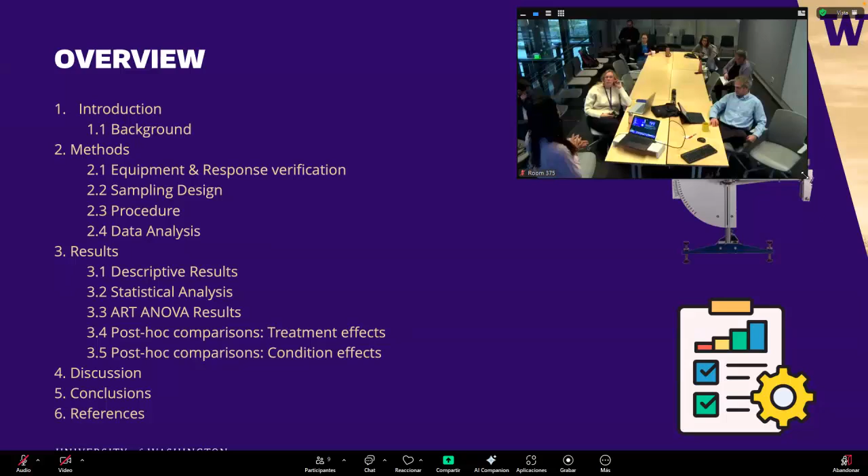This presentation will follow the structure of the written report. I'll begin with the background on slip biomechanics and previous research. Then I'll outline the methods used in the field testing. I'll present my descriptive results, the statistical findings, and some post hoc comparisons. Finally, I'll interpret these results from an industrial hygiene perspective, and I'll conclude with some recommendations for Sound Transit.

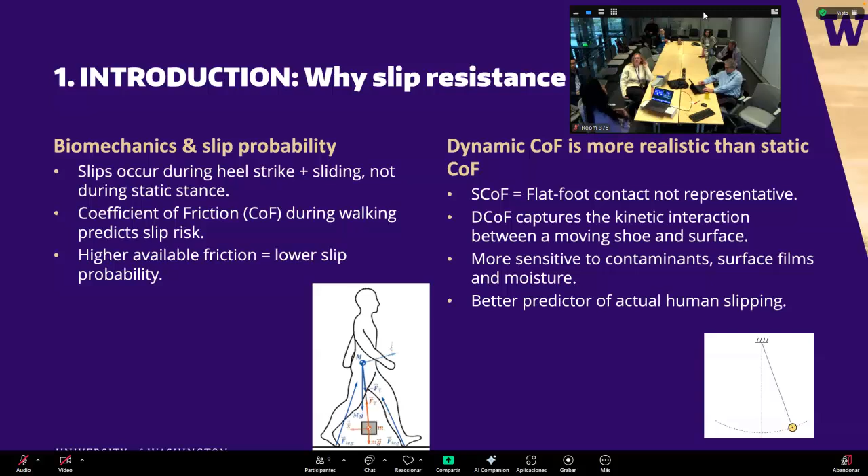So why do we care about slip resistance? Slips generally occur when the foot is already in motion, which is why static friction is not really representative of the slip risk. Instead, the dynamic coefficient of friction allows us to quantify the kinetic interaction and evaluate how contaminants like water reduce the available friction on the surface. Ultimately, higher friction corresponds to lower probability of slipping, making the dynamic coefficient of friction a more relevant metric for injury prevention.

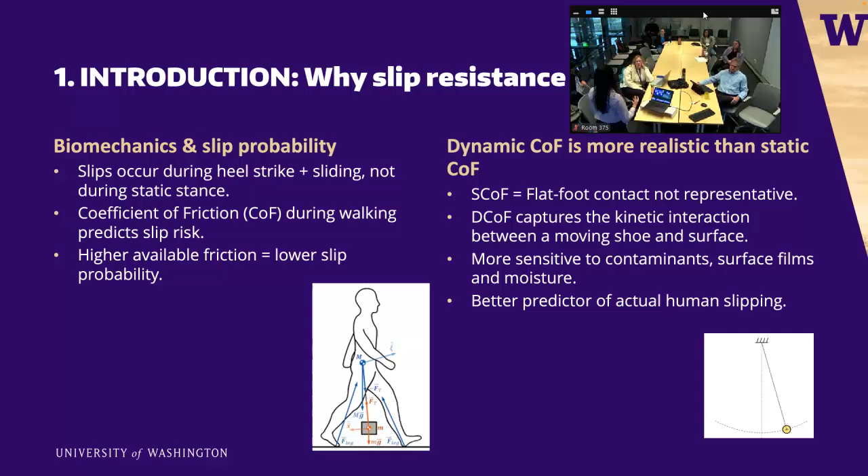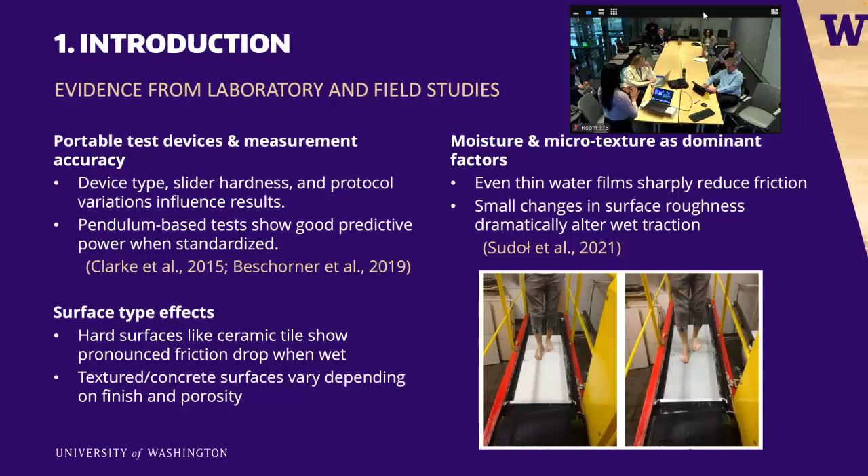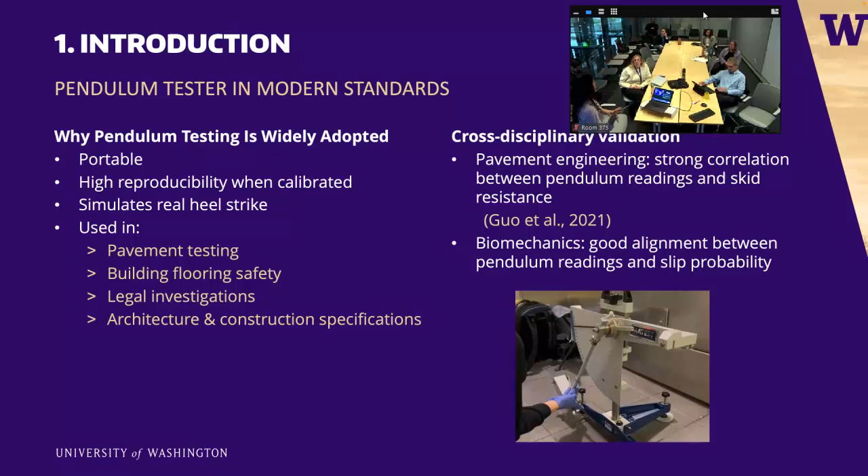The British pendulum tester, which is the device we use, remains widely used because it is portable, it is reproducible, and biomechanically relevant. It simulates the heel strike and captures the dynamic friction to reflect real pedestrian movement. Its validity has been demonstrated in pavement engineering and in slip biomechanics, where pendulum values correlate well with slip probability. This cross-disciplinary acceptance supports its use in transit environments, like the Sound Transit stations. Some interesting facts: the British pendulum tester was originally developed in the United Kingdom back in the 50s to evaluate skid resistance of road surfaces.

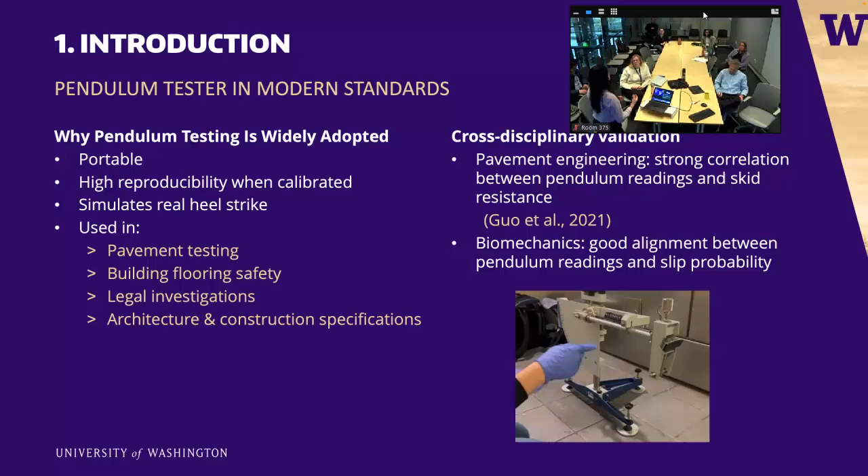There is no single universal slip resistance threshold. Instead, several standards provide frameworks for measurement and interpretation. The American Society for Testing and Materials, ASTM E303-22, specifies the test procedure, but leaves the acceptable PTV values at the discretion of the user. The United Kingdom Slip Resistance Group defines their score for high, moderate, and low slip potential using the same PTV values that are on the scale of the pendulum.

The British and European standard, BS EN 16165:2021, emphasizes the consistency and comparability of results across different European standards. The US standards from the American National Standards Institute, A137.1 and A326.3, recommend minimum wet dynamic coefficient of friction values, while the National Floor Safety Institute provides performance categories for walkways. Together, all these standards guide how the data should be gathered and evaluated.

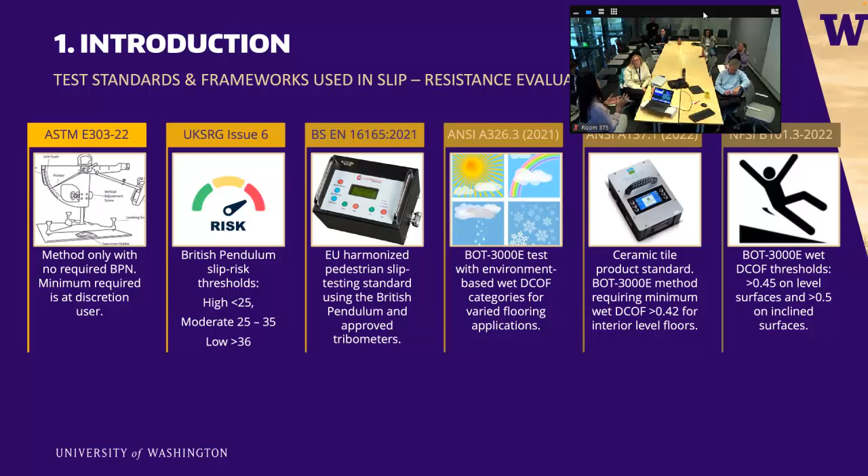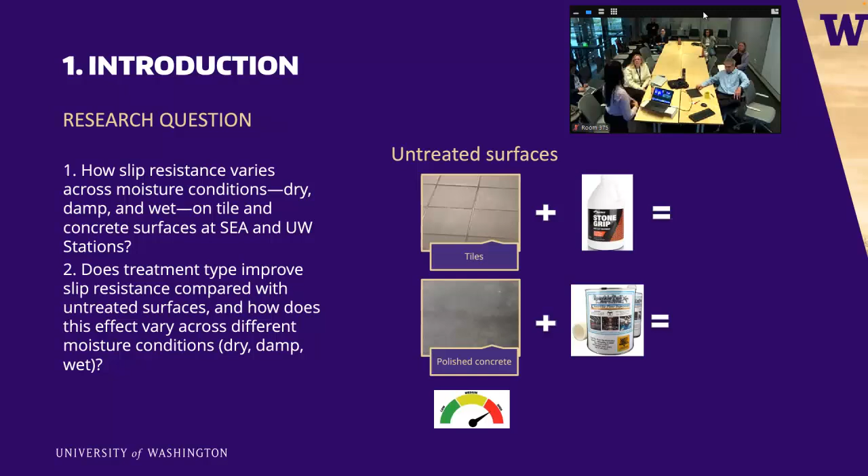The central question guiding this project was first, how slip resistance varies across moisture conditions, dry, damp, and wet, on tile and polished concrete surfaces at SeaTac Airport Station and the University of Washington Stadium Station. A secondary question was whether commercially available surface treatments like StoneGrip from Slip Doctors and a sparkles coating provide a meaningful improvement over the untreated surfaces.

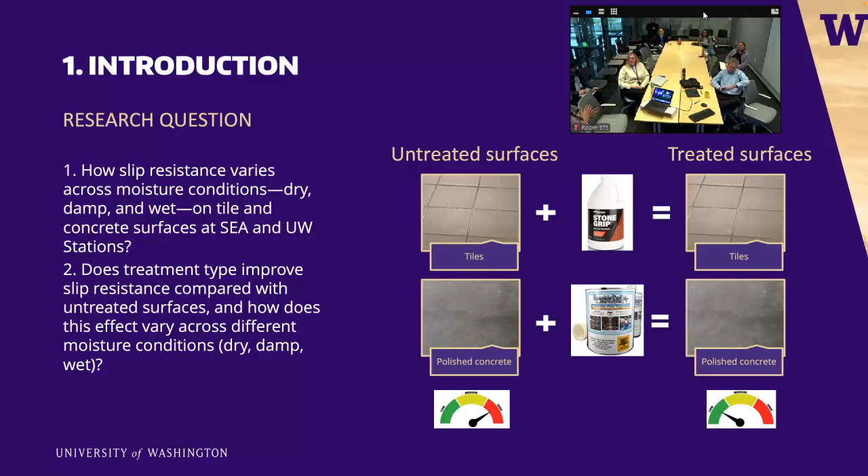So from the observations of untreated surfaces when they are wet, we can see an increase in the incidence of slips and falls. So we might think that by adding this coating, we will reduce the risk. That's our rationale. That's what we think. So we wanted to find statistical data to see if that improvement was significant.

Some background on the slip and fall incidents: from 2013 to 2025, Sound Transit recorded over 920 self-reported slip and fall incidents. Three stations, including SeaTac Airport, account for nearly half of these reported incidents. At SeaTac Airport, most incidents occurred on the escalators, but the mezzanine and platform also record a relevant rate. This data reinforced that wet conditions and certain flooring materials contribute to higher incident frequency, supporting the decision to evaluate these specific stations.

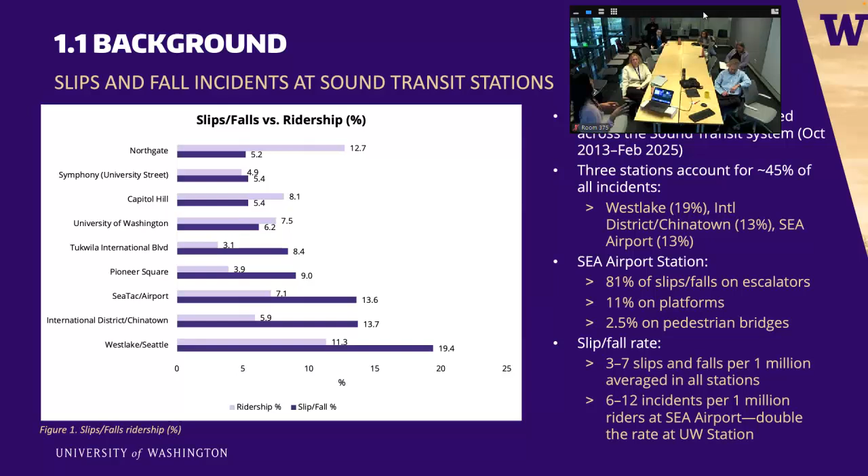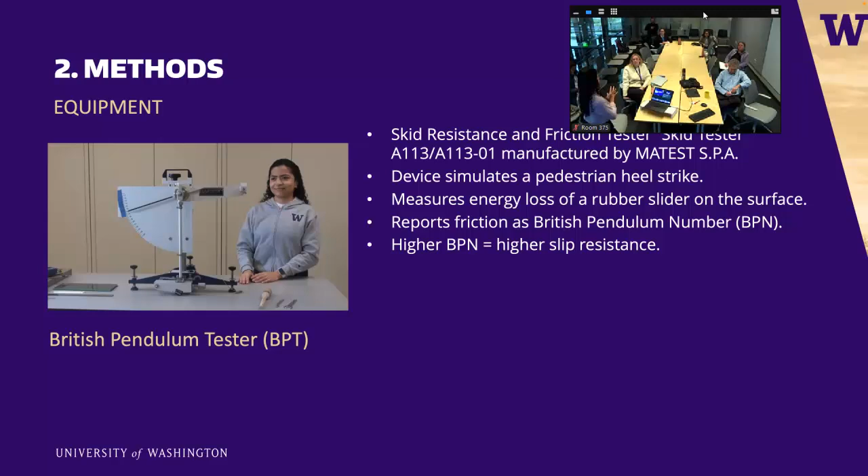Here's the device we used. The British pendulum tester measures the energy lost when a rubber slider contacts the test surface, reported as a British pendulum number. So we can tell that when a surface is more resistant, the slider can't swing further. I think I have a slider. This is my slider to simulate the slider from the pendulum. So you can imagine that when the surface has a higher friction, my slider can't swing any further. When I have my surface wet, or when the surface is very slippery, like polished concrete, my swing will travel further. Then I will get lower values. Higher friction, lower friction.

This device directly simulates heel strike dynamics, making it appropriate for pedestrian slip risk assessment. Its sensitivity to moisture and contaminants is aligned with the goals of this project.

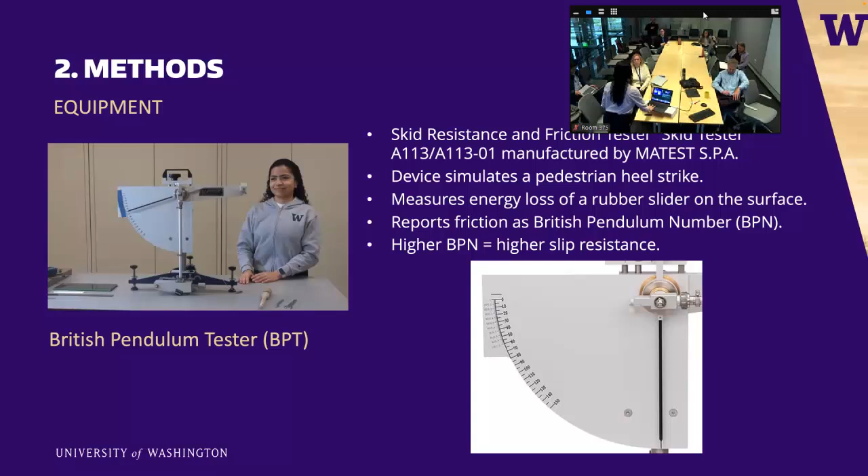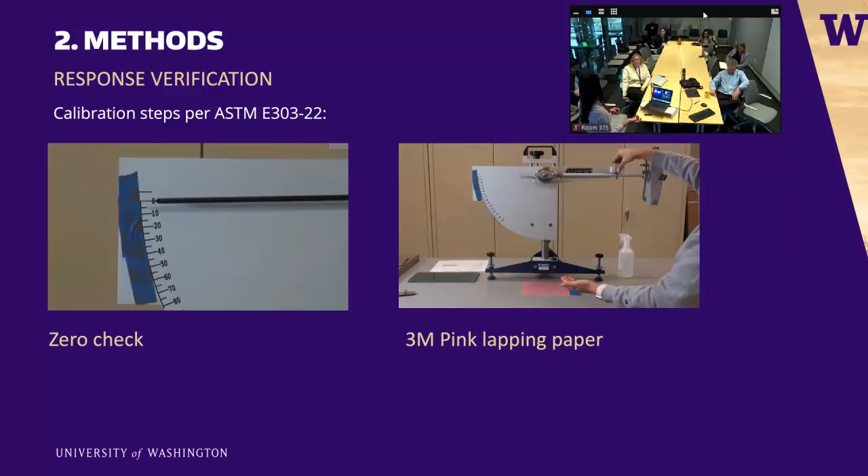We conducted a response verification to ensure quality and accuracy of our data. The device level, zero position, and sensitivity were verified per ASTM E303 procedures. We did 3 free swings to ensure that the pendulum returned to zero. And then we calibrated on the 3M lapping film paper, which is the pink paper you can see in the video. We know the resistance value of the paper, which is 65 plus or minus 3, to confirm that the device was responding correctly to those readings. These checks were repeated before and after every field session to ensure that the variation we were observing on the pendulum actually corresponds to a variation of the surface without any instrument drift.

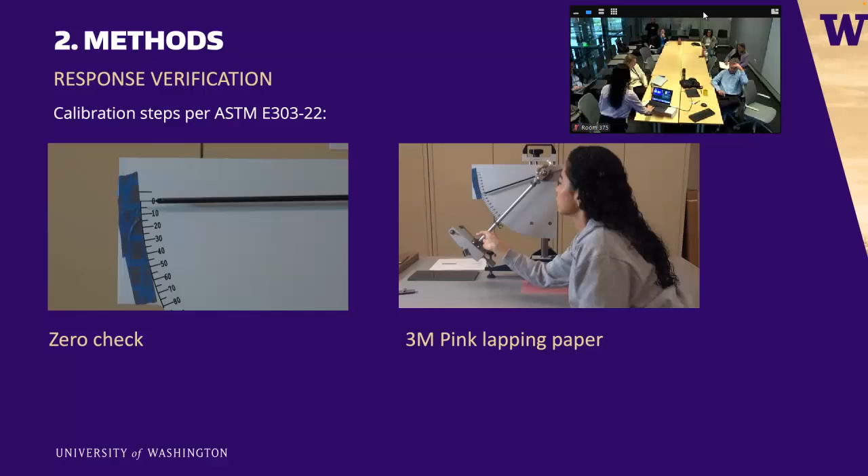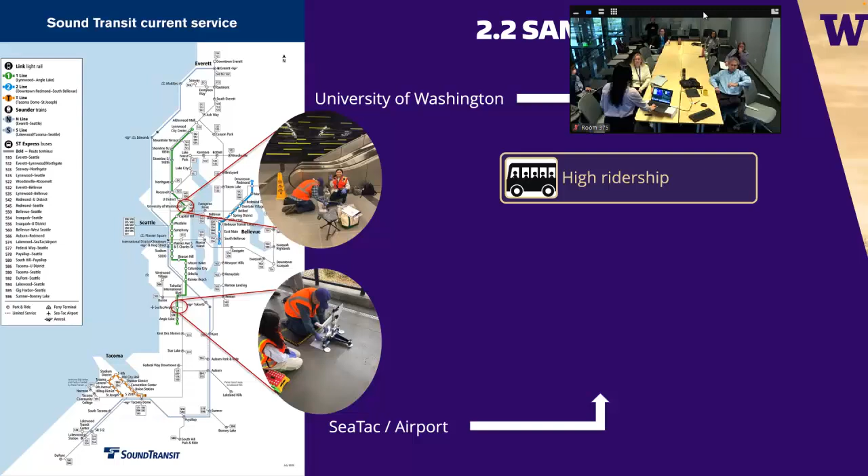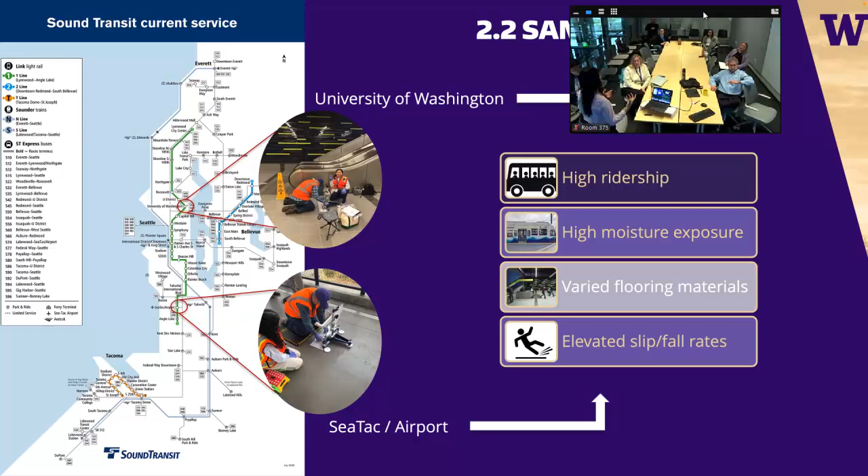They also represented stations with high rates of slips and falls. So the conditions at these stations are realistic for evaluating public exposure context. These are the sampling locations from the University of Washington Station. We selected 2 locations in the platform and 2 locations in the mezzanine. Every spot corresponds to high and low traffic. High traffic are the yellow numbers and low traffic are the green numbers.

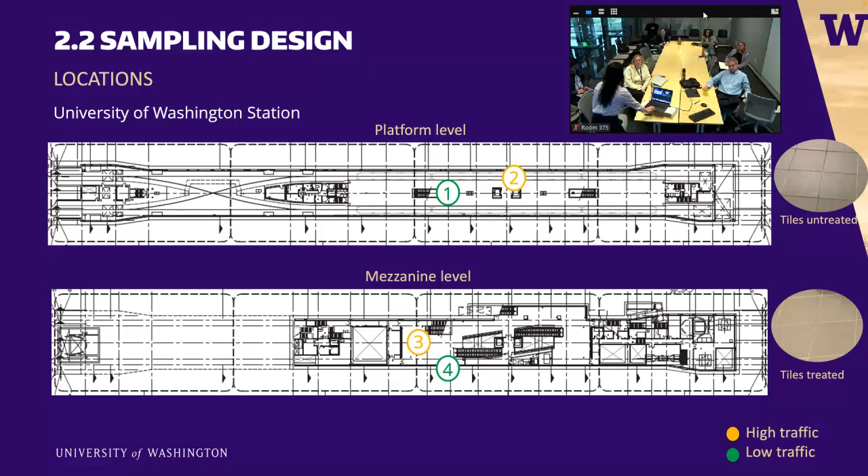In the platform level, we had the tiles untreated, and in the mezzanine level, we had the tiles treated with a stone grip. At Seattle Airport Station, we did 8 different sampling locations. In the mezzanine level, we had the Sparkle Tuff and the polished concrete. In the platform level, we had the untreated tiles. This provides us an opportunity to evaluate real-world treatment performance in the case of the Sparkle Tuff.

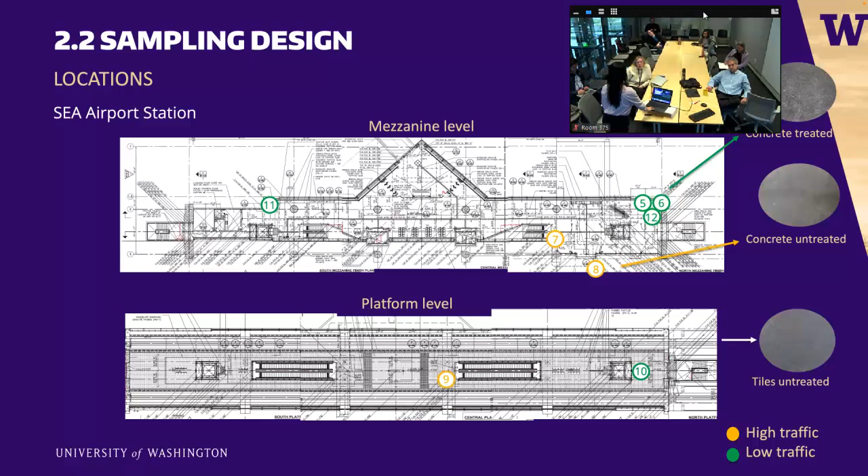The testing followed ASTM E303 and BS EN 16165. So we started by cleaning the surfaces. Then, according to the condition that we were trying to assess, we applied water. For the dry condition, we didn't apply any water. For moist condition, we did 2 sprays of water, and for wet condition, we did 4 sprays. Then we took 8 readings at 0 degrees. Then we rotated the pendulum at 90 degrees and repeated the procedure as wet, damp, and dry.

At each site, we recorded the eight readings in this form that you're watching. We then discarded the first 3 readings to allow slider conditioning, and the remaining valid swings were averaged to produce a single BPN value. So you can see the last 5 readings from the wet condition at 0 degrees and the last 5 readings from the wet condition at 90 degrees were all averaged to produce 1 BPN value for this sampling location at wet condition. The same for damp and the same for dry.

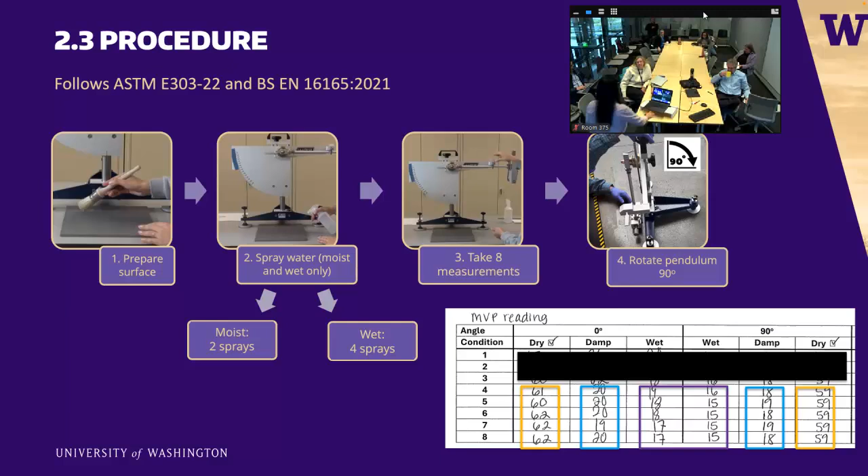The BPN values were interpreted using the UK SRG slip potential framework. All the values below 25 indicate high slip risk. The values between 25 and 35.9 moderate risk, and 36 and above low risk. This UK classification is widely used for pedestrian surfaces because it provides a practical interpretation of the BPN values in terms of injury risk, which is a term that safety professionals and industrial hygienists are fairly familiar with.

Before jumping to the stats, I would like to recall something that Professor Julia used to do in her lectures. Professor Julia was a professor of toxicology, and she was very thorough in her classes. She often liked to add extra content to her presentations, and that content wasn't included in the module. So before she started talking about this extra content, she said, you don't have to worry about this in the final exam. This is just to give you a flavor. When we were actually doing the final exam, we were all like, but it was just to give us a flavor.

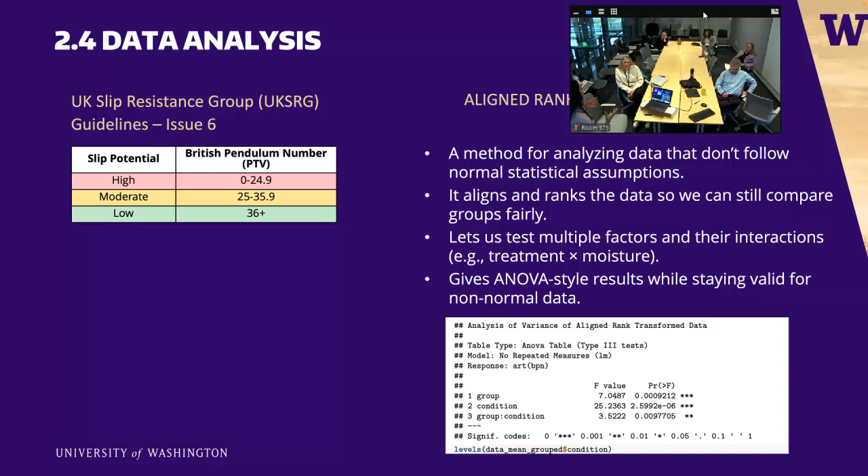So the F value represents the ratio of the variance between groups over the variance within groups. It is a unitless variable. The higher this F value, the stronger the evidence of a real effect. The P value tells us whether that F value is statistically significant or not. So P values under 0.05 mean that the effect is unlikely due to chance. So we can conclude there is a true difference among the groups.

It is also important to distinguish why we used the mean BPN and why we didn't compute our entire data, because each location is the actual sampling unit, while the repeated 5 readings are technical replicates, not independent observations. The only independent observation is the BPN average per condition per location. So using the raw readings would artificially inflate the sample size, a problem known as pseudo-replication. Averaging the valid readings per condition per location provides a statistically appropriate data set for the ANOVA testing.

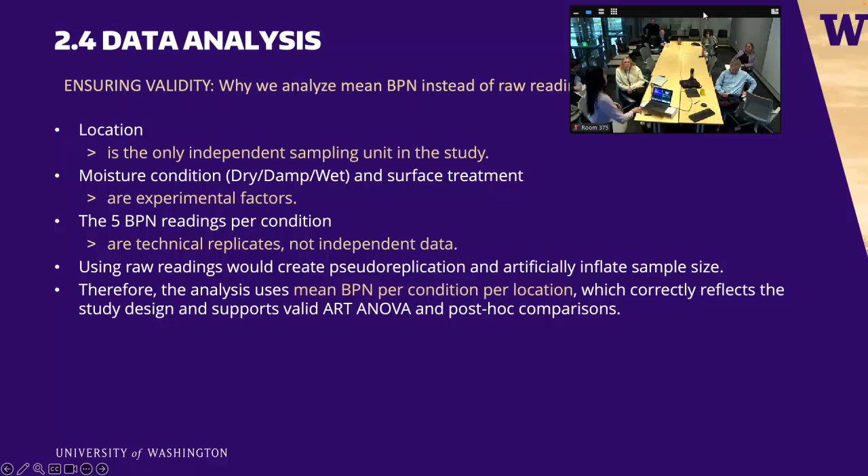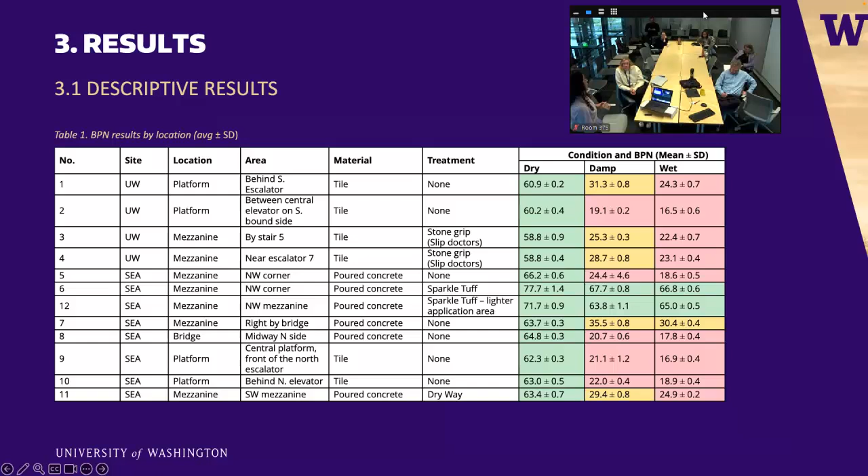This table lists the mean BPN values for all 12 locations. So as expected, nearly all surfaces show substantial decreases when they move from dry to damp to wet. The untreated surfaces often drop sharply into moderate or high slip range when they are wet, whereas the Sparkle Tuff remains with high BPNs even under wet conditions.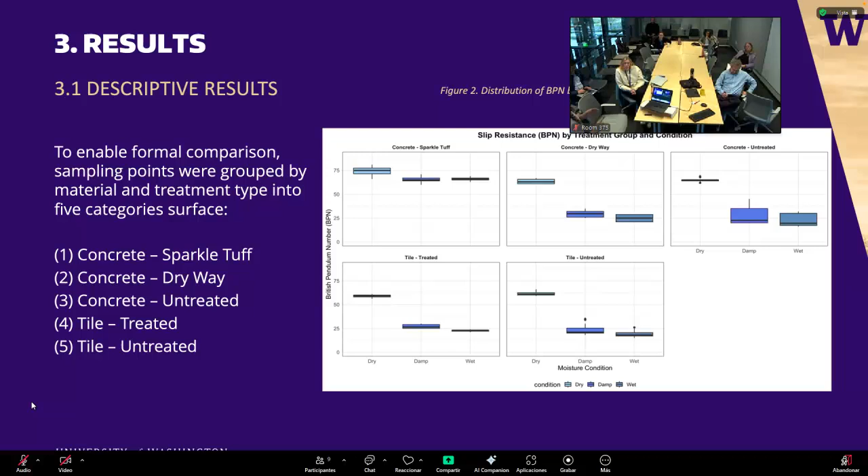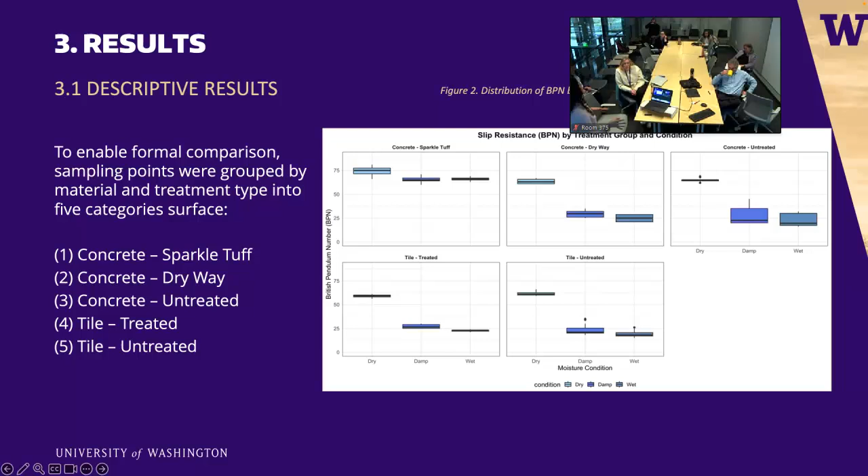We grouped our data according to the treatment. So we had 5 groups, 3 for the concrete: coated with the Sparkle Tuff, concrete treated with Dry Way, and the just polished concrete, which we call concrete untreated. And for the tiles, we had 2 groups, the tiles treated with the Stone Grip coating and the tiles untreated. This box plot illustrates the distribution of the BPN by treatment category and moisture level. Across all materials, BPN decreases as moisture increases.

Here is a detail of the result of the test for normality and heterogeneity. In the Shapiro-Wilk, which is a test for normality, we found that 11 groups from 15 had p-values under 0.05, meaning those 11 groups are not normally distributed. Because the majority of our data set is not normally distributed, we can't use a parametric test. In the Levene's test, we had an F-value of 7.54 and a p-value showing it is significant. That means the variances across the groups are not the same.

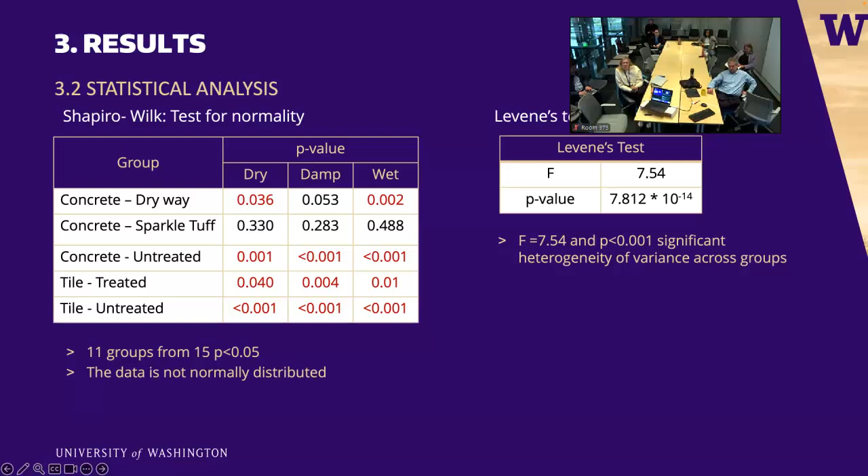We finally ran QQ plots that confirm skewness. We can see some outliers in the red circles. So these three tests, the Shapiro-Wilk, the Levene's, and these QQ plots, are essential to decide what is the appropriate test to answer our research question. They supported and validated the use of a factorial design, non-parametric ANOVA.

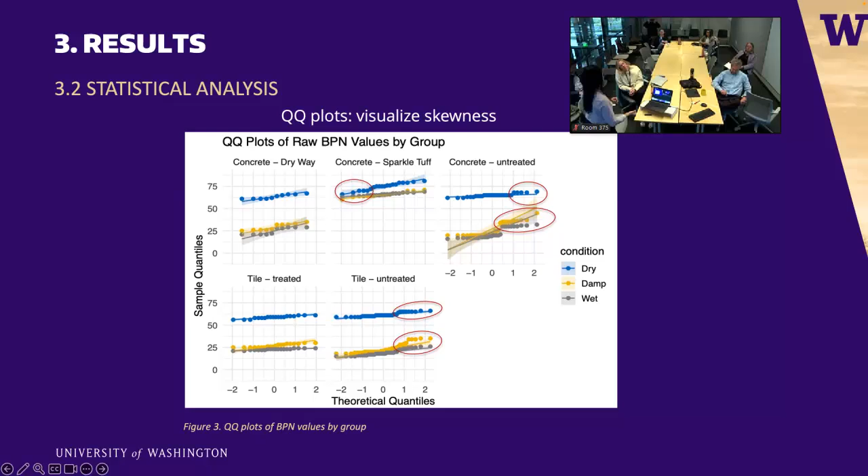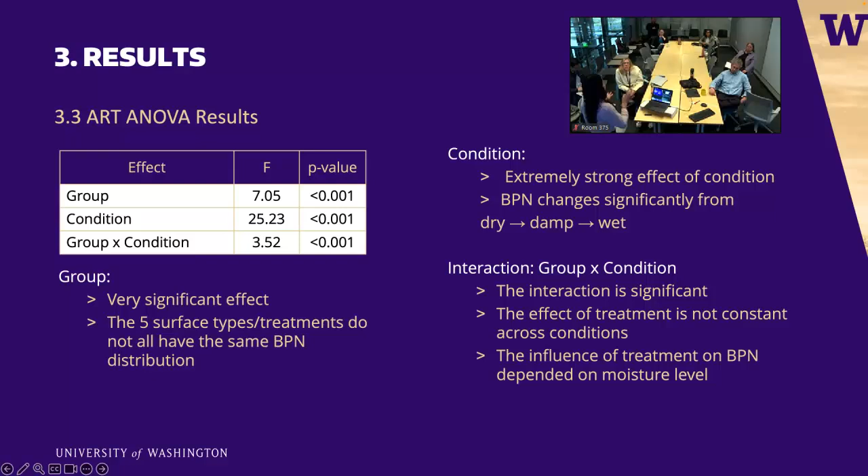These are the results we got from the model. The model showed a significant main effect of treatment and condition, as well as a significant interaction between these two. This means that friction is different between treatment types, and the effect of moisture is also different across these treatments. In plain words, treatments perform differently depending on whether the surface is dry, damp, or wet.

These interaction plots illustrate that lines are not parallel, confirming that there is a treatment-condition interaction. The Sparkle Tuff shows consistently high BPNs regardless of moisture, while untreated surfaces drop sharply from dry to wet. This visualization reinforces the statistical finding that treatments do not perform equally across moisture levels.

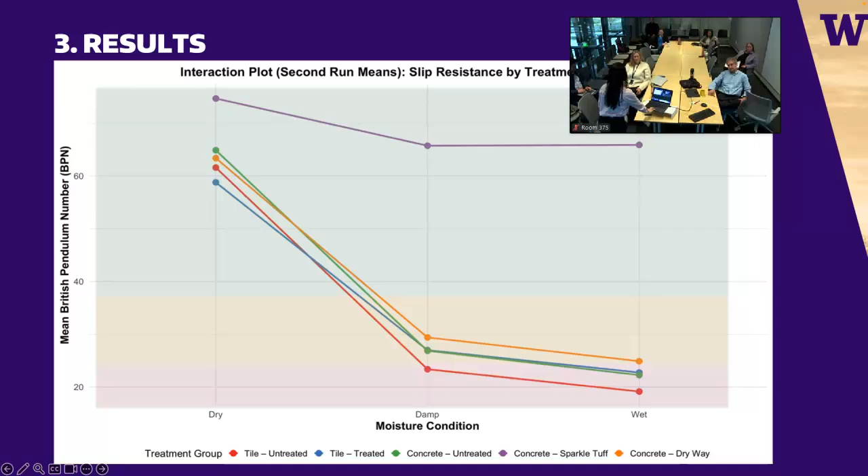The post hoc showed that Sparkle Tuff significantly improved the surface friction compared to its untreated counterpart. On the other hand, Dry Way coating and Stone Grip on tiles did not produce a statistically significant improvement. This indicates that only one of the tested treatments meaningfully altered the slip resistance. From the moisture contrast, all were significant. Dry is significantly higher than damp, and damp is significantly higher than wet. This just confirmed the expected trend we had before the study.

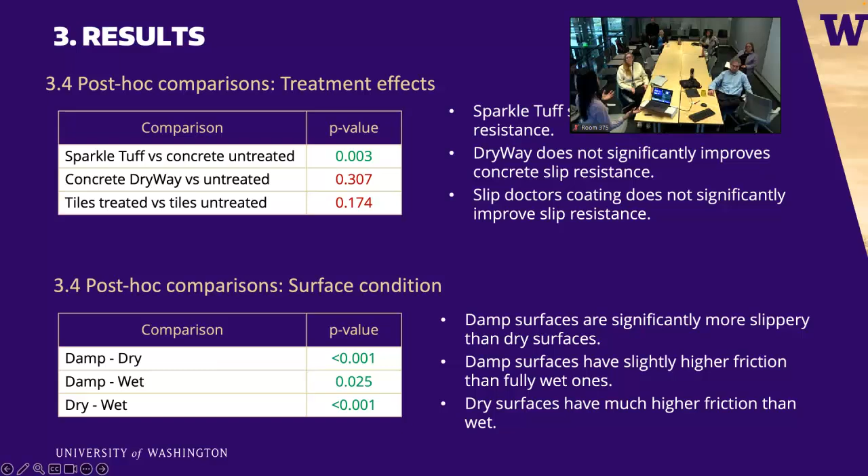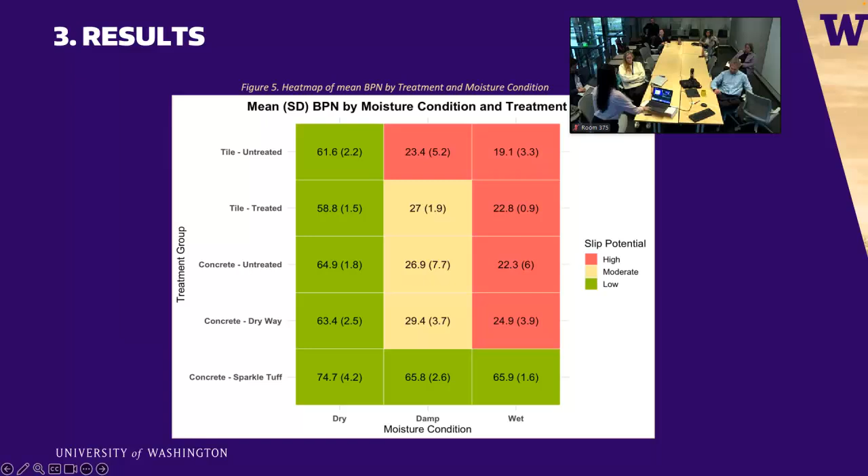This heat map summarizes the mean and standard deviation of the BPN values ranked by treatment and moisture. The red areas indicate high slip, the yellow moderate, and the green low slip potential. Again, the untreated tile and untreated concrete show the higher slip potential when wet, whereas Sparkle Tuff remains in the low risk category.

The results strongly show that moisture is the primary driving factor of slip risk across all tested surfaces. The treatment type can influence the outcome, but only Sparkle Tuff showed a significant improvement. Overall, untreated tile and untreated polished concrete transition from safe to hazardous when wet. These findings directly support the research question by quantifying how moisture impacts traction.

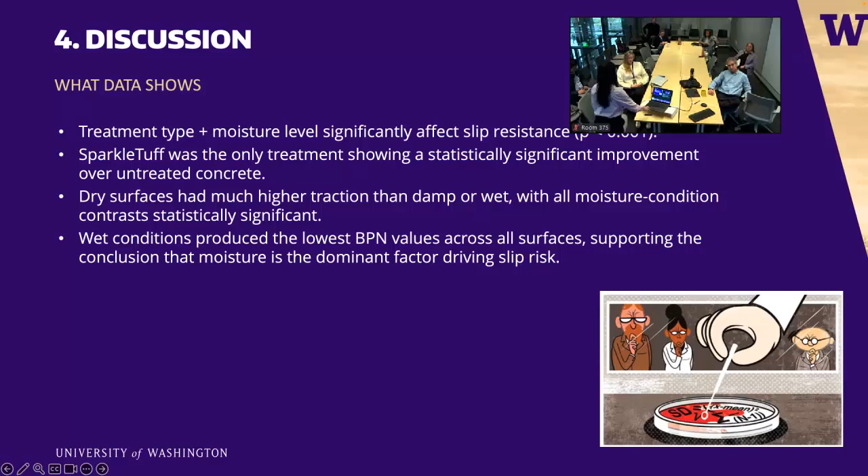From an industrial hygiene perspective, slipperiness can be viewed as a physical hazard resulting from inadequate friction. In the hierarchy of controls, we favor slip-resistant surfaces, such as textured concrete, because these eliminate the hazard at the source. The surface coatings function as engineering controls, but they may pose chemical exposure during the application, during cleaning, during maintenance, and in future they might require reapplying. So understanding both friction performance and worker exposures is critical to make informed material selection.

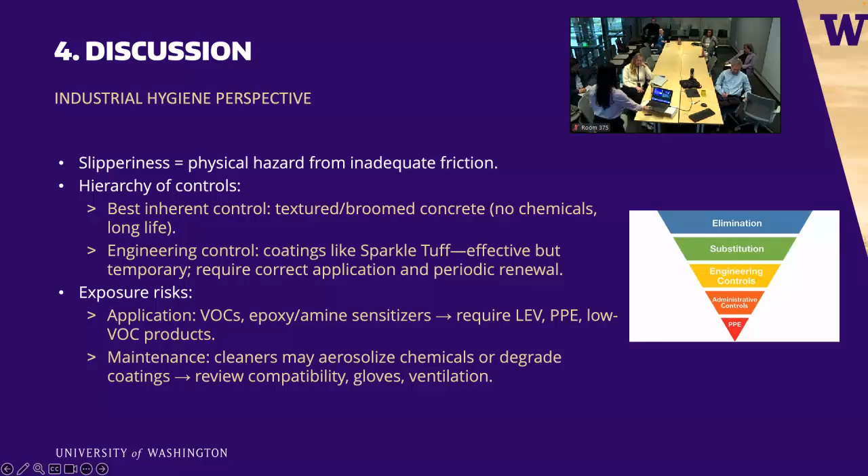Some practical recommendations for Sound Transit. They can benefit from adopting slip testing protocols, setting minimum wet BPN thresholds for their stations, and periodically reassessing the surfaces as the coatings age with time. Long-term strategies include textured surfaces, improving the drainage, and optimizing their cleaning protocols. These preventive measures are durable and reduce the dependency on coatings.

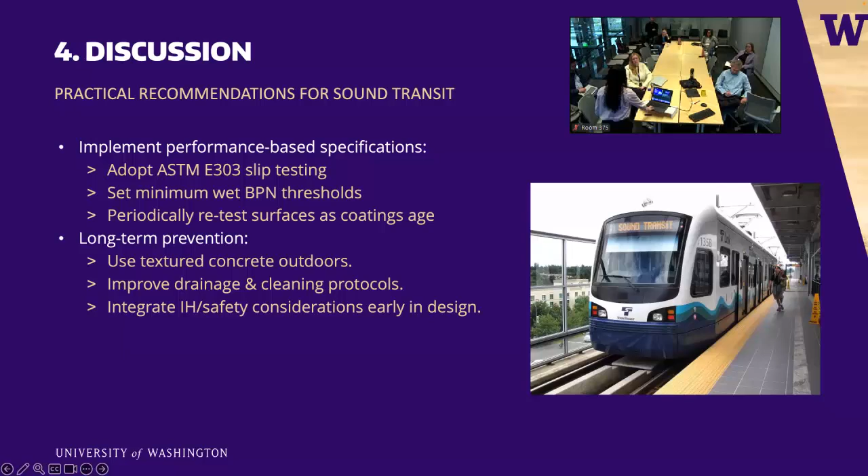To conclude, moisture causes substantial reductions in slip resistance, with untreated surfaces becoming hazardous when wet. SparkleTuff was the only treatment that provided significantly higher wet condition traction. These findings support performance-based material selection and emphasize the importance of early involvement of safety and IH professionals in the design stage of these public spaces. Ultimately, data-driven evaluation can improve pedestrian safety and reduce the burden of slip-related incidents.

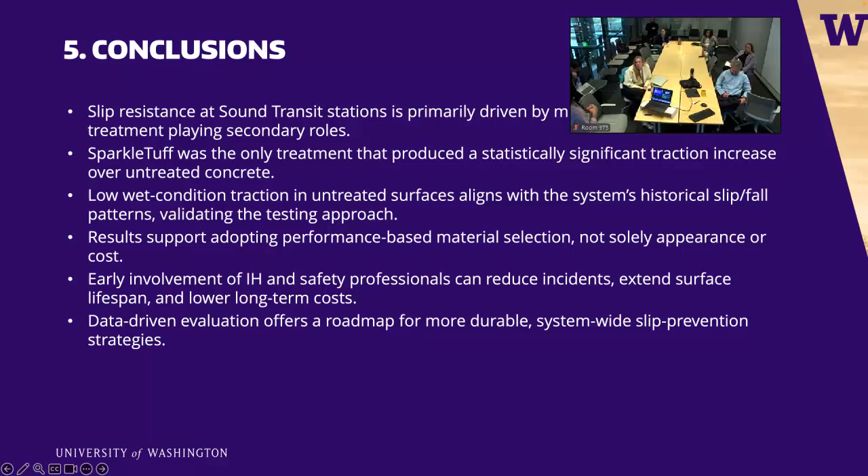Thank you. Excellent job. Now you can take a breath, okay? You're getting a lot. Yeah. Laurita. I'm gonna drink some transit water. Don't spill it on the station. The carpet's gonna be wet.

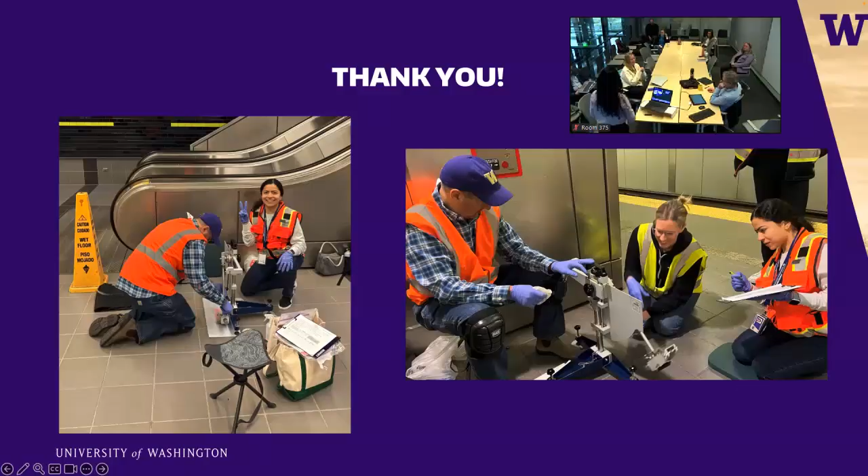Got it. Because actually, it was designed based on how nice it looked. Yeah. Now they're realizing. Architects. Architects' decisions. Got it. But I also think that there was a mandate when it was passed that there has to be an aesthetic element to the new stations. And some of that is when you go through the stations, you'll see art, local artists, but I think it's, yes, architects designing for aesthetics as things mandated.

Got it. I was surprised that the platform level had more of the not treated concrete. Well, the treated concrete was only treated because they were doing tests. So it wasn't full blown. It was just tests, so we could test it. It was just the corner. If I can show you the map, there were 3 dots in one corner of the mezzanine level. They just applied the coating in that corner for us to test.

Oh, no kidding. Well, all of us who do this, we are constantly looking and evaluating the slipperiness. And measuring with our foot. How slippery is it? Yeah, I did that after the project. You become like a human slide. Yeah, I can just measure with my foot. Well, actually, right up there where the red bricks were. Yes, that isn't good either down here. And the concourse for the Husky Stadium.

Okay, any other questions? I thought you did a great job at the end summarizing why eliminating the physical hazard is important. And then you talked about some of the chemical exposure risks of the coatings. I was just curious to know what kind of data did you find about that? Or have there been measurements when these things are being applied? Has anybody worked on that?